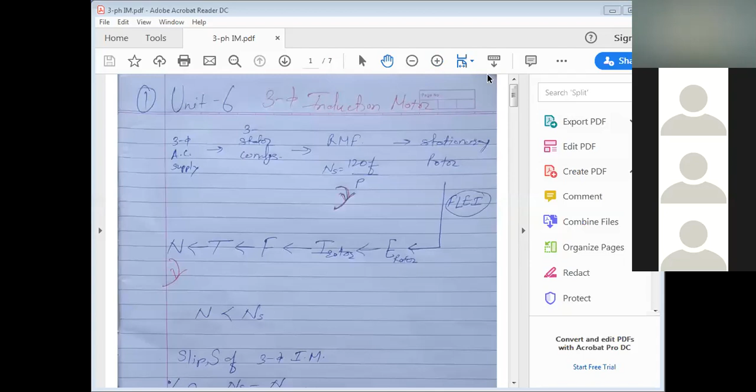Okay, can everyone see the PDF? Yes ma'am. Okay, so in previous lecture we have seen the construction of three-phase induction motor, its working principle, its types, and difference between two types.

In short, I'll revise. On stator, three-phase windings are there. In the terminal box, 6 terminals are there using which you can connect these windings either in star or in delta. Stator core is laminated, made up of silicon steel. Physically poles are not there; you can wind stator windings either for 2, 4, 6, or 8 poles depending on applications.

Next, rotor core is made up of silicon steel. Again it is laminated. There are two different types of rotors: squirrel cage and slip ring.

In slip ring induction motor, 3 windings are there and they are always star connected, wound for same number of poles as on stator. In slip ring, external resistance you can add with the help of slip ring brush arrangement. Why is there a need to add external resistance? Because you can increase starting torque produced by motor, and also variable speed is possible, meaning you can change speed with change in rotor resistance. So that is the facility available in slip ring, that is phase wound three-phase induction motor. External resistance you can change, starting torque you can increase, and speed of motor also you can change.

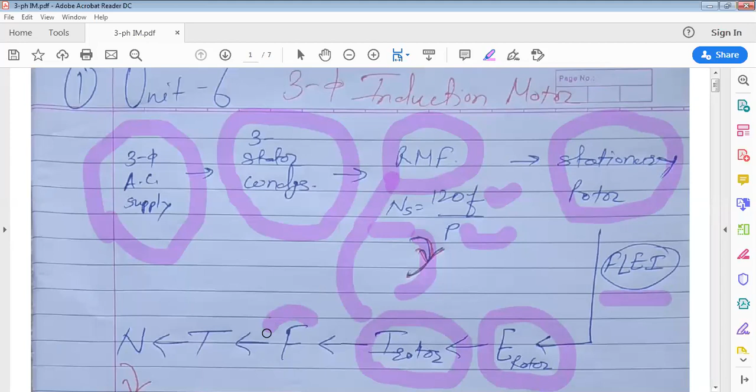Now this rotating magnetic field produced by stator comes in contact with stationary rotor. So as per Faraday's law of electromagnetic induction, EMF gets induced in rotor conductors or windings. The circuit in rotor is closed, so current starts to flow. It's the case like a current carrying conductor placed in a rotating magnetic field, so force acts on each and every conductor, torque is produced, and the windings are so designed that because of the torque acting on each rotor conductor, the rotor rotates in one particular direction.

As per Lenz's law, whatever this speed is, it's because of torque, which is because of force, which is because of rotor current, rotor induced EMF, and this induced EMF is because of the rotating magnetic field. So as per Lenz's law, the direction in which the rotor rotates will oppose the cause producing it, and the cause is the rotating magnetic field rotating in clockwise direction. So rotor will rotate in such a direction that the relative speed difference between rotating magnetic field and rotor speed is less. If both rotate in opposite directions, that relative speed difference will be more. So as per Lenz's law, to reduce the cause producing it, rotor also rotates in the same direction as the rotating magnetic field.

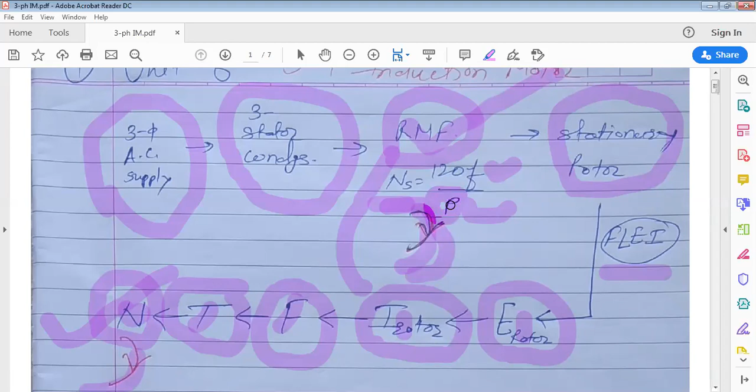So we have seen for frequency 50 hertz, number of poles on stator suppose 4, ns we get 1500 rpm. Now consider rotor is rotating at 1300 rpm. Rotor speed is always less than speed of rotating magnetic field, because of rotor inertia. Suppose rotating magnetic field rotates at 1500 rpm, speed of rotor will be less than that, again because of rotor inertia. So it always rotates at a speed less than the speed of the rotating magnetic field.

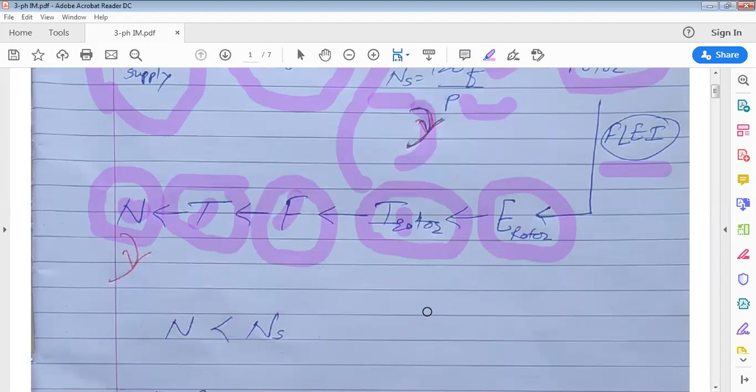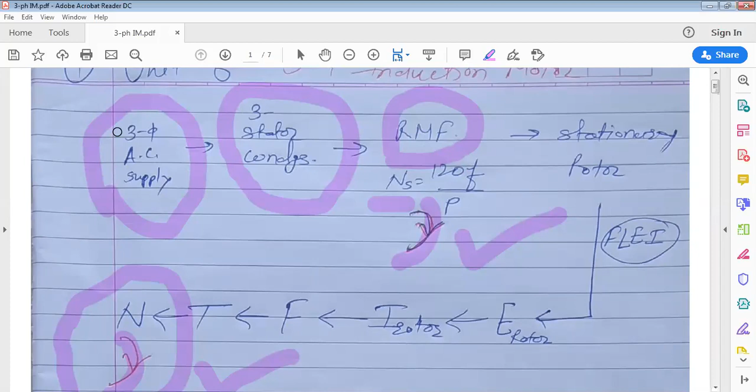So the relative speed difference will be less when both are rotating in the same direction, rotating magnetic field at 1500 rpm and rotor speed at 1300 rpm. Now if you reverse the rotor direction, you have to reverse the rotating magnetic field. How to reverse it we have seen: by swapping any two terminals of the three-phase AC supply to the stator winding, R to R, Y to Y, B to B. Swap any two terminals, then the direction of the rotating magnetic field changes, and so the rotor direction also changes.

Now, ns is the speed of the rotating magnetic field, and capital N is the speed of the rotor. So ns minus n upon ns is called the slip of a three-phase induction motor, denoted by capital S. So S, which is slip, equals ns minus n upon ns.

All of you have to concentrate on this, because numericals will definitely be based on it, MCQ questions, and 4 marks and 6 marks questions too. So slip, denoted by capital S, equals ns minus n upon ns, and percent slip is that multiplied by 100. If you simplify this formula, you get N equals ns into 1 minus s.

Now tell me, the moment you switch on the supply voltage, what is the value of S? What is the condition at t equals to 0? At start, what about the speed of the rotor? The three-phase induction motor works on Faraday's law of electromagnetic induction, mutual induction. Very good. Value of S is 1.

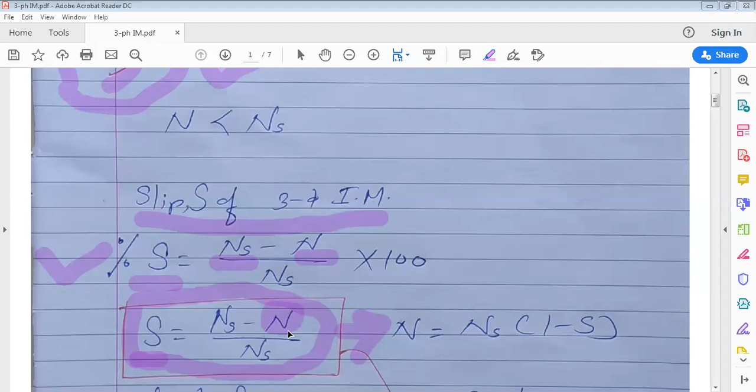The moment you switch on, for a few milliseconds or microseconds, the rotor is not rotating, it is stationary, meaning n is 0. So if n is 0 at start, what is the value of s? It's ns by ns, so it will be 1. Everyone keep this in mind, because in MCQs and sometimes in numericals they ask: at t equals to 0, at start, what is the value of slip? So slip is 1.

Can n be equal to ns? N is speed of rotor, ns is speed of rotating magnetic field produced by stator. So n and ns will never be equal, because of rotor inertia, n is always less than ns. So can slip be 0? When n becomes equal to ns, what will be the value of s? Suppose n and ns are equal, then what is the value of s? Zero, very good. So s can never be equal to 0, because n and ns can never be equal.

So the formula of slip you all got: ns minus n upon ns. Suppose you're asked to calculate the full load slip, then whatever speed is used at that time is the full load speed. So in general, the formula of slip is ns minus n upon ns, and for full load slip, the speed used is the full load speed.

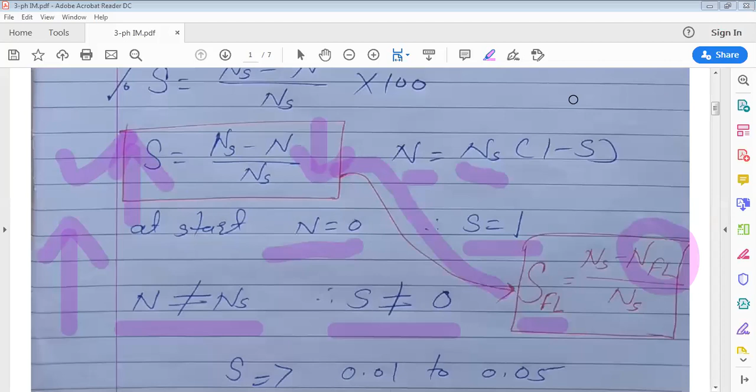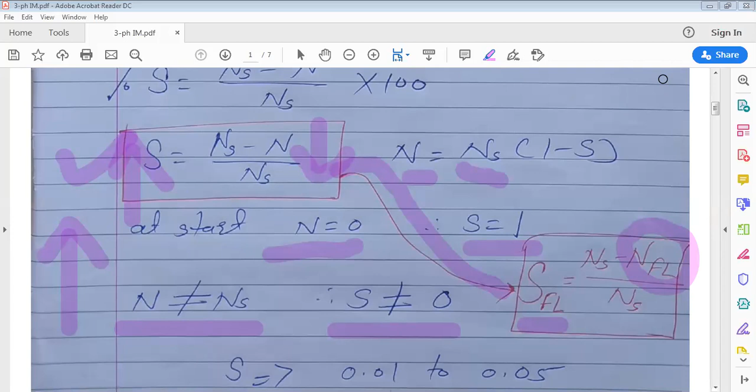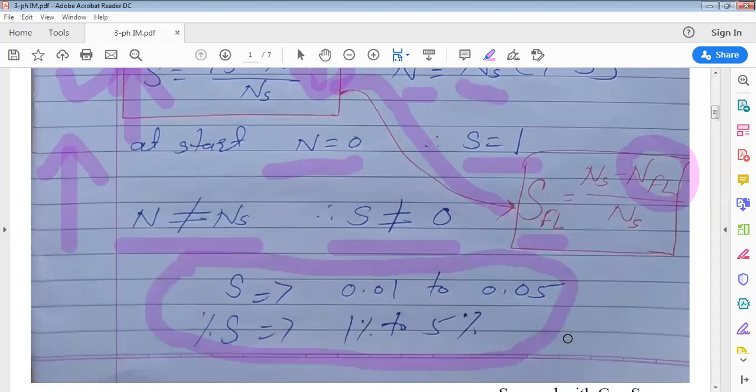What is the maximum value of slip? It is 1, and that occurs only at start, because at start speed is 0. In practical applications, you will find the value of slip only in the range of 1 to 5%, that is 0.01 to 0.05.

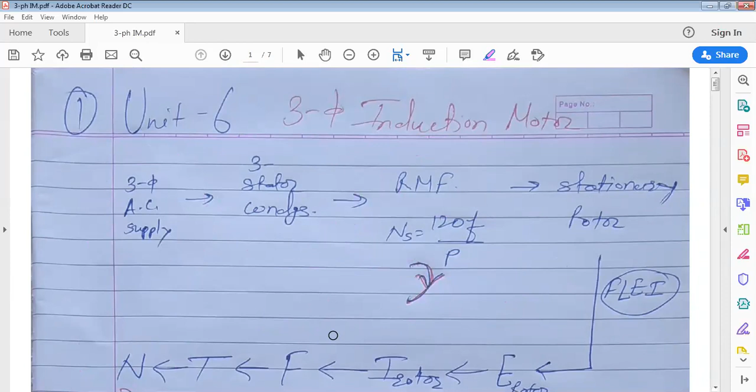Now we have seen the working principle. It works on Faraday's law of electromagnetic induction and mutual induction. So up to the point current is flowing through the rotor, whatever EMF is induced in the rotor is AC, and its frequency is the same as the supply frequency.

But later on, once current starts to flow, the rotor starts to rotate. The moment the rotor starts rotating, this induced EMF's magnitude and frequency both change. So when the rotor is stationary, the induced EMF is called E2. Once the rotor starts to rotate, the induced EMF in the rotor under running condition is called E2R. Suffix 1 is for stator, suffix 2 is for rotor parameters.

So here also E2, and here also E2 — both refer to induced EMF in the rotor. Then what is the difference between E2 and E2R? E2 is the induced EMF in the rotor when it is stationary, and E2R is the induced EMF in the rotor only when it starts to rotate.

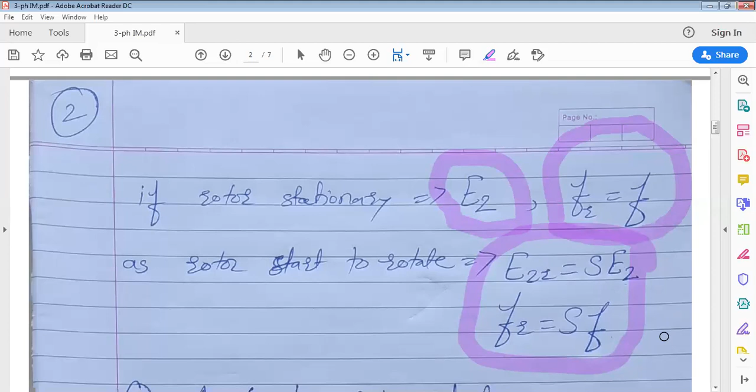The induced EMF, E2R, is AC and its frequency also changes because speed is changing. So FR is equal to S into F. Based on both formulas, you will get numericals. As rotor speed changes, S changes, and that's why induced EMF in the rotor also changes, along with its frequency. So: E2R equals S into E2, and FR equals S into F. At start, for that brief moment, induced EMF is E2 and maximum, with frequency same as supply frequency, 50 hertz. But as the rotor starts to rotate, frequency starts to decrease.

Based on this, numericals will be there. What is the first formula? Ns is equal to 120F by P. Keep all these formulas in mind: Ns is equal to 120F by P, and slip — keep all three formulas in mind.

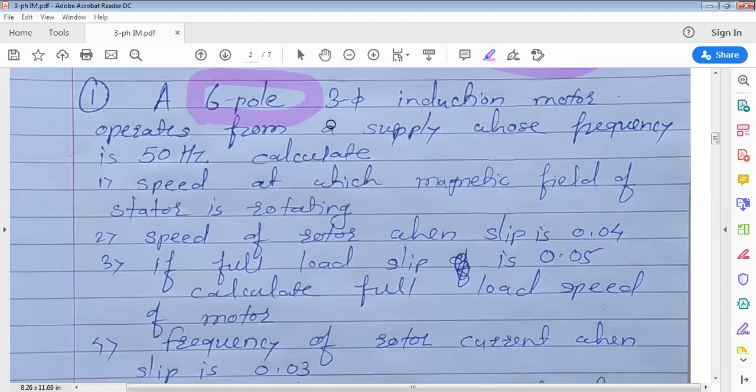6-pole 3-phase induction motor operates from a supply whose frequency is 50 hertz. This means these are the stator specifications: 6 poles are on the stator, it's a 3-phase induction motor, and whatever supply you give, its frequency is 50 hertz. What have you been asked to calculate? The speed at which the magnetic field of the stator is rotating.

Now tell me, the magnetic field of the stator rotates at what speed? Means, what is that speed called? Is it capital N or capital NS? NS, very good. What is the formula? NS is called the synchronous speed.

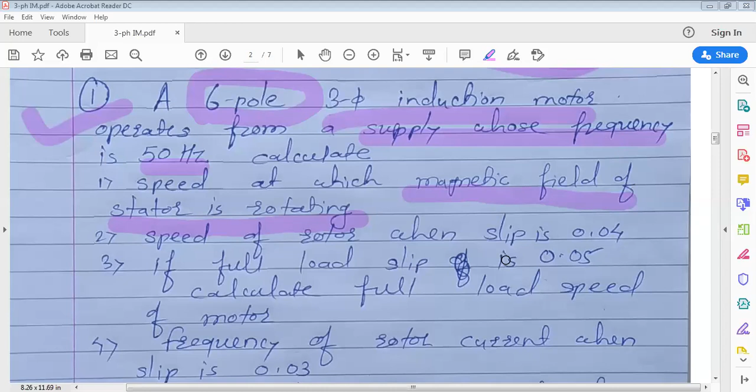120 F by P, all of you know the formula. So you can calculate it. NS equals 120 F by P. Frequency is 50 hertz, number of poles given is 6. So NS is 1000 RPM. Got it?

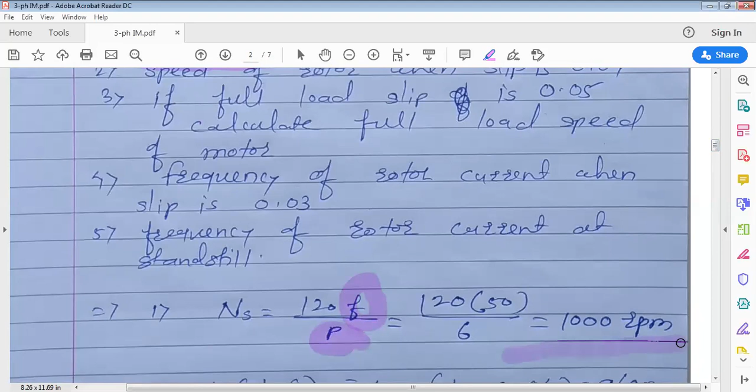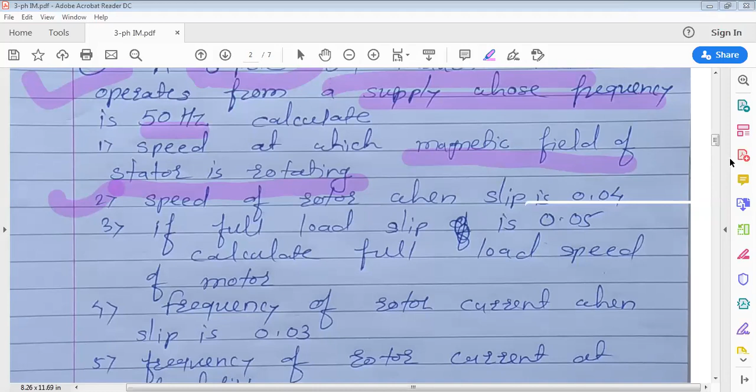Okay, second part: speed of rotor when slip is 0.04. So slip is given and you have to calculate speed of rotor. Which formula can you use? Speed of rotor we denote by capital N, slip by S. Slip is given to you, suppose slip is 0.04. What will be the speed of rotor? The formula we know is S equals NS minus N upon NS.

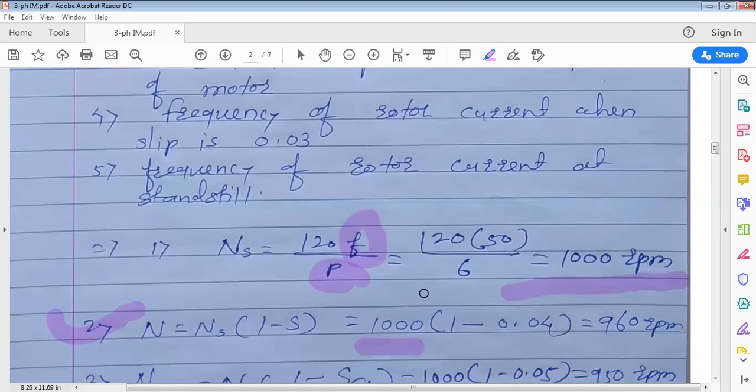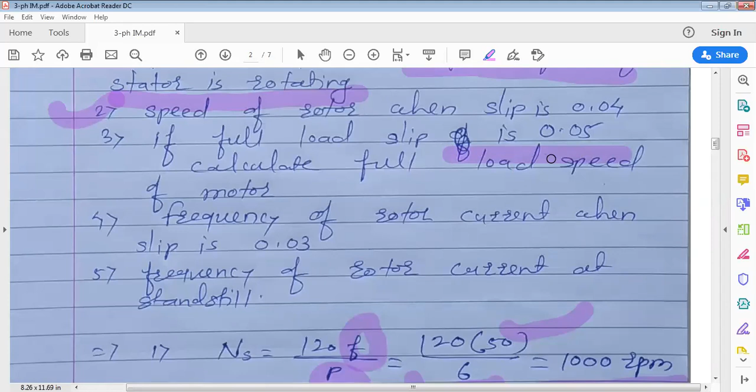If you simplify it, what formula do we get? N equals NS into 1 minus S. NS remains constant because frequency is constant and number of poles are constant. So NS remains constant, and 1 minus S, where S is given to you as 0.04. So put this value, you get 960 RPM. All of you can see N is always less than NS.

Now tell me, does slip remain constant or does it change? Suppose I am changing the load on the induction motor continuously. So tell me, does slip remain constant or does it change? Who can tell? Using the slip formula, all of you know it changes. Very good, because the formula of slip is S equals NS minus N upon NS. As you increase the load, speed decreases, so slip will increase. The reverse will occur when you decrease the load. Clear? What is the conclusion? Slip is not a constant parameter; as load on the motor changes, slip changes.

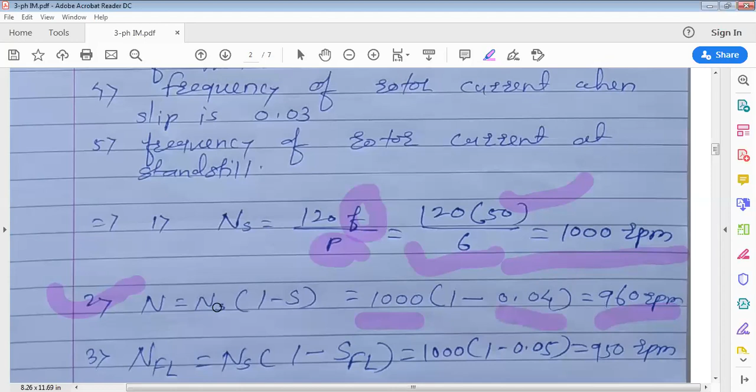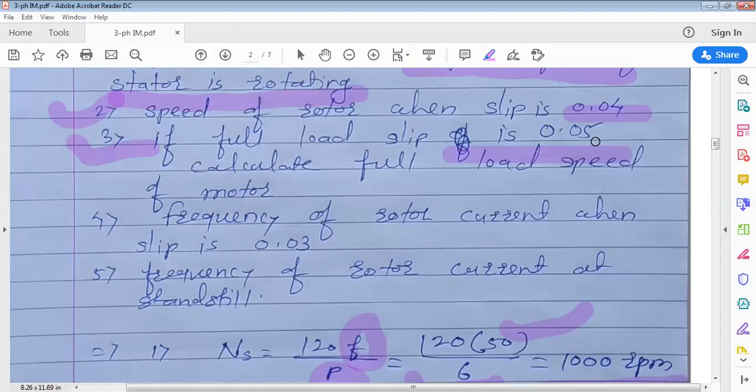So if slip is 0.04, at what speed will the rotor rotate? 960 RPM. Next question: full load slip is given to you. If the full load slip is 0.05, calculate the full load speed of the motor. Use the same formula, only slip is full load and speed is full load. So full load slip is given as 0.05, speed will be least because full load means it is fully loaded, meaning maximum load on it, so speed will be less, right? Because the more the load, the lesser the speed. So you can see at maximum load, slip will be...

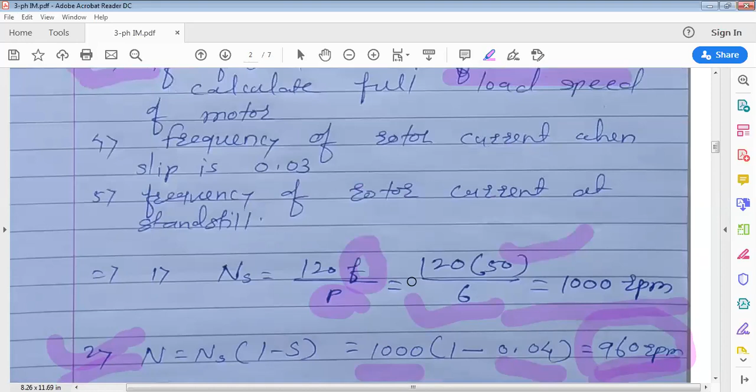Load is maximum, okay, so slip is 0.05, it is given to you. For fully loaded condition, slip is 0.05. So speed is how much? 950 RPM. For maximum load, speed is less. And if you see this formula, if it is fully loaded, what does that mean? Speed is minimum. Right now speed is minimum. If speed is minimum, then slip is maximum.

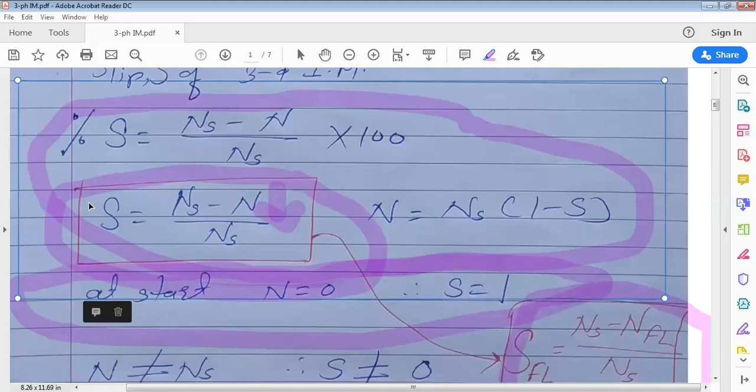Maximum value of slip is there at fully loaded condition. Value of S can never be 0, it is always greater than 0 and less than 1. Value of S will be equal to 1 at start, but it will never be equal to 0.

Maximum is the load on motor, minimum is the speed, so slip is maximum at that point. Maximum value of slip is 1, which is there at the start. At start, speed is 0, so slip is maximum and equals to 1.

If we continuously change the load on motor, what is the other parameter? If load is maximum, then speed is minimum, so whatever slip is there, that also will be maximum. Then the third parameter is full load speed, 950 RPM. Got it?

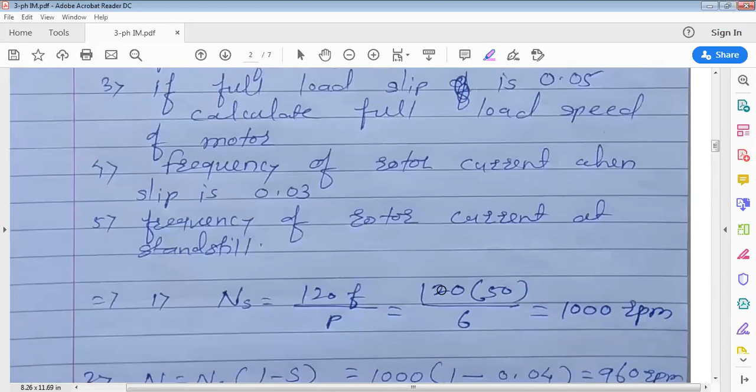Okay, next one we'll see, what is the next parameter? They ask you the fourth one: frequency of rotor current when slip is 0.03. So we have seen the formula, what is it? f2 is equals to S into F.

Whatever the induced EMF in rotor, its formula we know, it is AC, which is equal to S into E2. Whatever the frequency of this induced EMF is, its frequency is S times supply frequency. So S times supply frequency is the frequency of induced EMF of rotor. This formula all of you know.

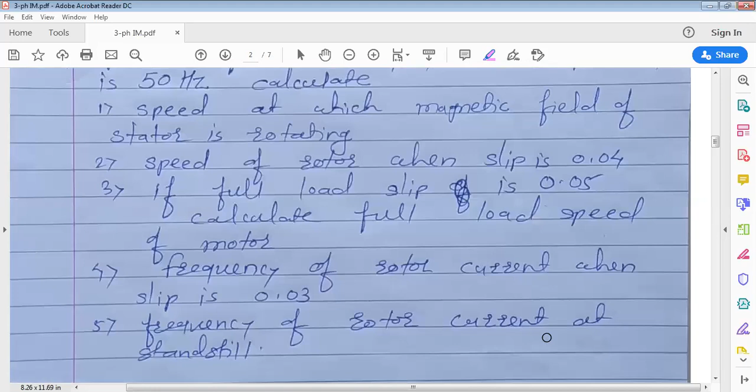So what you have been asked: frequency of rotor current when slip is 0.03. Here slip all of you know, frequency of supply given is 50 hertz. So all of you can see its frequency is less. As load changes, slip changes, frequency of induced EMF changes. So it is very less, all of you can see.

And on frequency, which losses depend? See here, very important parameter, what is the supply frequency? What is its value in India, what is the value of supply frequency?

3 phase, 50 hertz. So on stator side, we are giving 3 phase AC supply. What is the frequency there? 50 hertz. Now that rotating magnetic field comes in contact with rotor. In rotor also EMF is induced, and what is that frequency? S times F, which is very less.

All of you can see, because S is in the range 0.01 to 0.05 in practical applications. So 0.05 times 50 hertz or 0.01 times 50 hertz is very less, all of you can see, it is very less.

So tell me, frequency is different, there is a difference in frequency. For stator side, frequency is very high. Rotor side, frequency is very less. Now you tell me, on frequency which losses depend? We have seen losses and their formula. You tell me which losses depend on frequency.

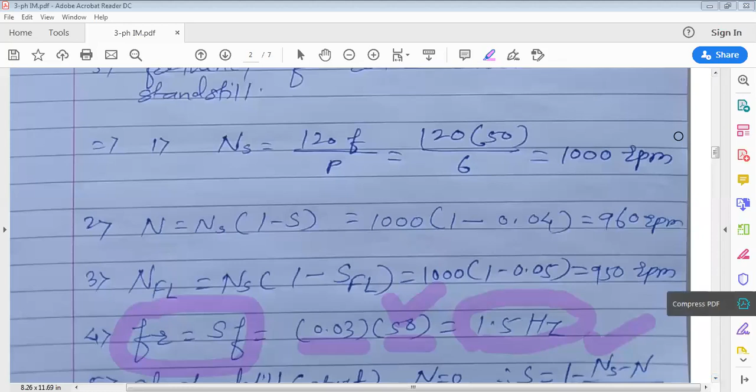Next, frequency of rotor current at standstill. Who can tell? Standstill means what? At start, the moment you switch on supply, that is standstill. Tell me.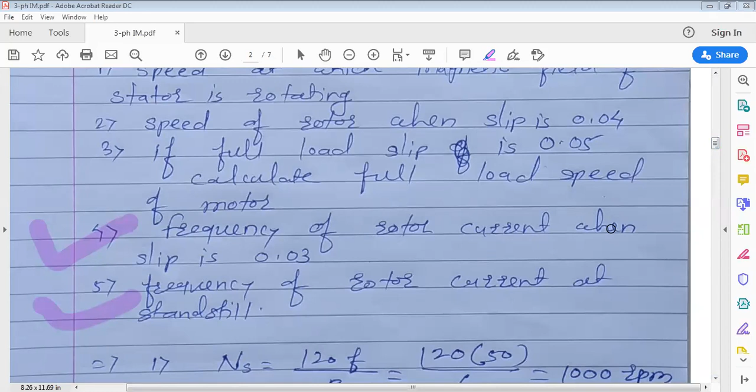No, it's not zero. Frequency of rotor current at standstill is 50 hertz. Very good, because at standstill, the formula is Fr equals S into F.

At start, the moment you switch on, speed is zero. If speed is zero in this formula, what is S? It is equal to 1, which is maximum. If S is 1, and into 50, that is 50 hertz. Clear? So the moment you switch on, for a few milliseconds or microseconds, the rotor doesn't rotate.

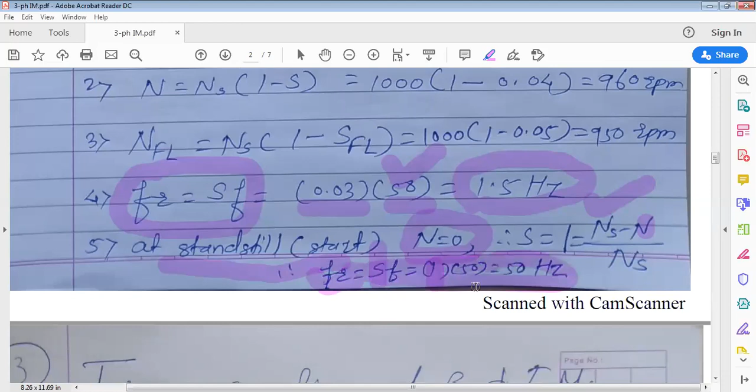So S is 1, so for that few milliseconds or microseconds, whatever the induced EMF in rotor, its frequency is 50 hertz. It is only for a few microseconds, or maybe even less time than that. Clear, this sum? Everyone prepare this sum.

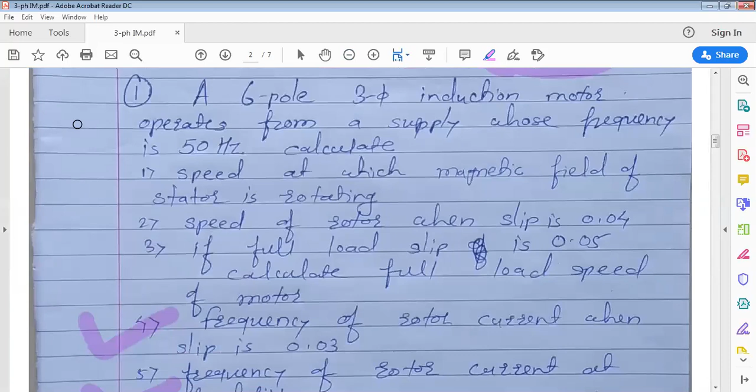MCQ questions are based on this, then 4 marks, 6 marks questions. Sub part of it for 1 mark, complete sum for 4 or 6 marks. Got the sum? Can we go for the next topic?

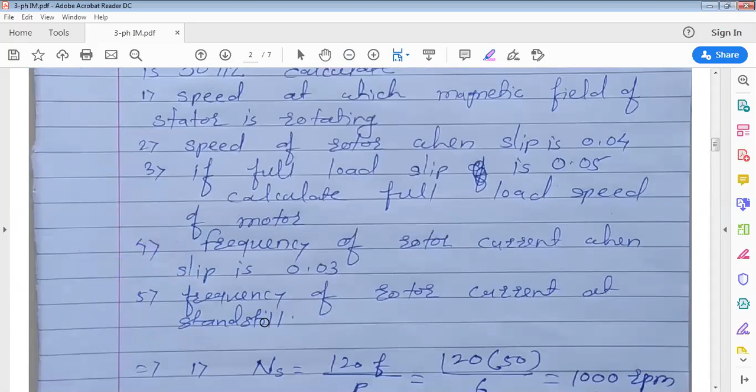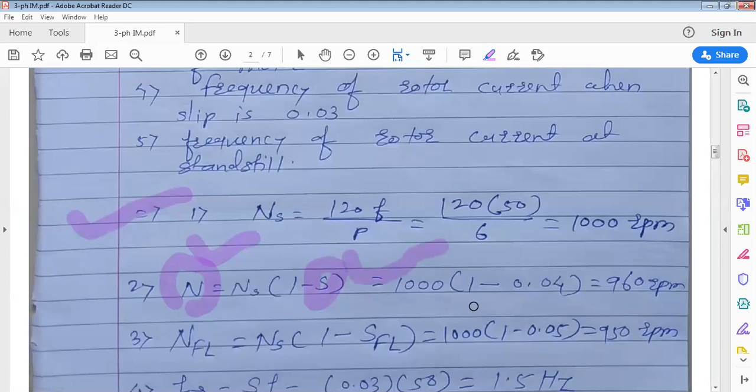Clear sum? Easy hai? Synchronous speed of rotating magnetic field, 120F by P, slip is given to you. You can calculate speed or reverse. Sometimes speed is mentioned and you're asked to calculate the slip. Same formula you can use for full load also.

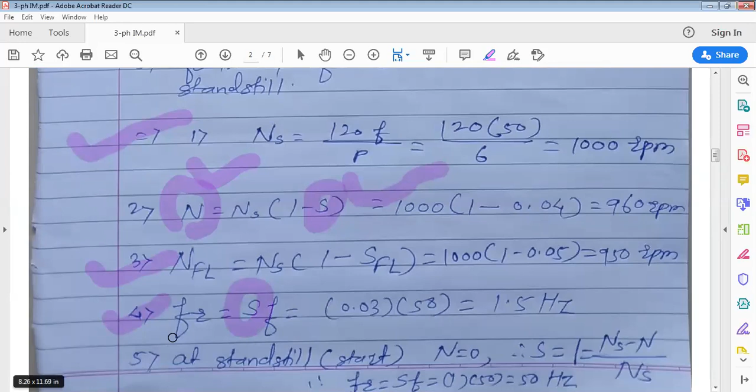This formula you know, Fr equals S into F. So for some particular slip, the value of frequency of induced EMF in rotor you can calculate, and at standstill, at start, keep this formula in mind: S is always 1 and Fr is always 50, same as the supply frequency. Can we go for next part?

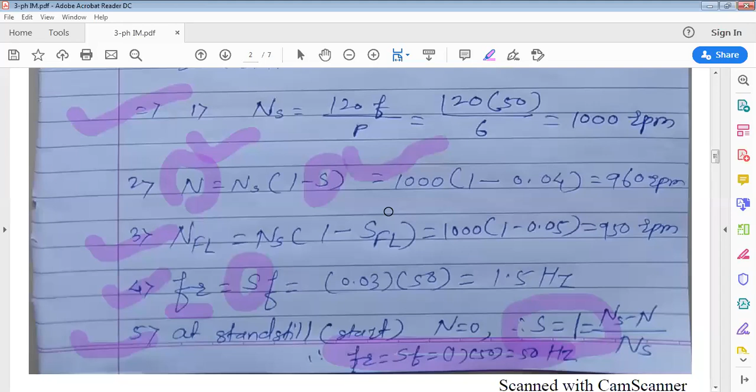Next part is the torque equation of three-phase induction motor. Can we start with the next part? Yes, is everyone clear up to this?

Reply in the chat box, can we go for the next topic? Got the sum? Clear up to this? Okay, we'll start with the next topic, the torque equation of three-phase induction motor.

Once we derive the torque equation on this, derive the expression for torque of induction motor, and once we derive the torque equation, we can go for the torque-slip characteristics of three-phase induction motor.

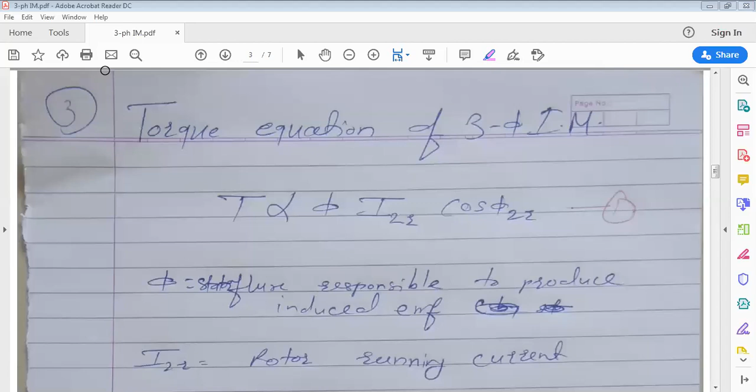So who can tell me, torque motor produces? We have seen this one. Tell me about the torque produced, we are going to derive the expression for this torque, which acts on rotor and due to which rotor starts to rotate.

Now tell me, this torque which acts on each and every rotor conductor, what do you think it depends on? Which parameters? Yes tell me, what do you think? Many parameters are there, any one or two can you tell?

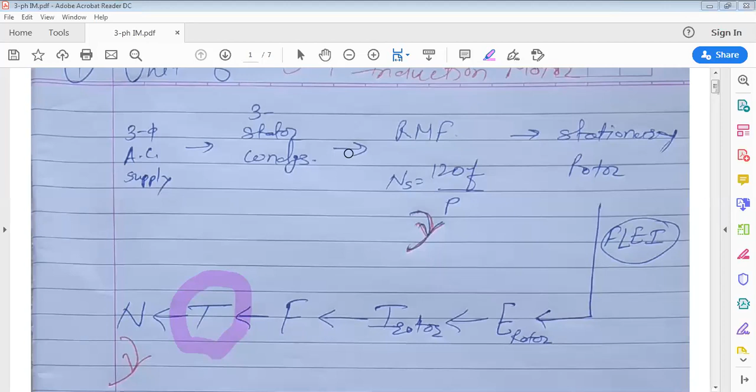Yes, this torque produced, it depends on which parameter? Current, very good, which current? Rotor current. Again which parameter? Does this depend on magnetic field? Rotating magnetic field also it depends on. This one, again cos phi.

Okay, so these are the parameters used in derivation. So whatever torque acts on the rotor conductor, it depends on stator flux, because this is the flux produced by stator, and because of this flux only, EMF is induced in rotor, right?

It depends on current flowing through rotor also, and cos phi means power factor. Power factor of what? Obviously torque acts on rotor, so obviously rotor power factor, but under running condition. So these are the three parameters considered here: rotating magnetic field, rotor current, and rotor power factor under running condition.

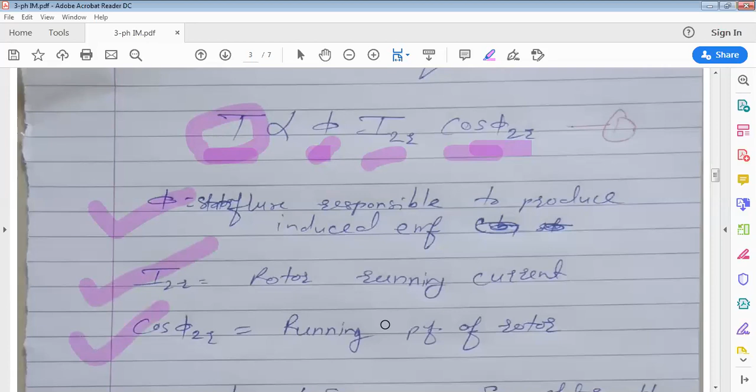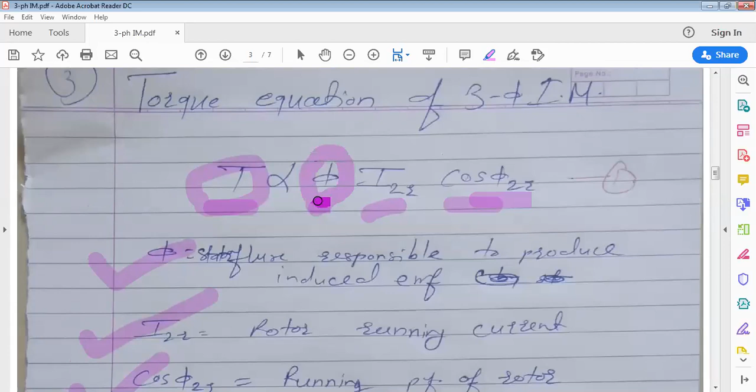2 means what? Stationary. And 2R means what? Running condition. Okay, now whatever this rotating magnetic field which is produced by stator, it depends on supply voltage, that is the stator voltage. We have seen the working principle of three-phase induction motor is same as that of transformer.

It works on Faraday's law of electromagnetic induction, mutual induction. Stator winding we can consider as primary, and rotor winding we can consider as secondary of transformer. So whatever is the transformation ratio formula for transformer, same you can use for three-phase induction motor.

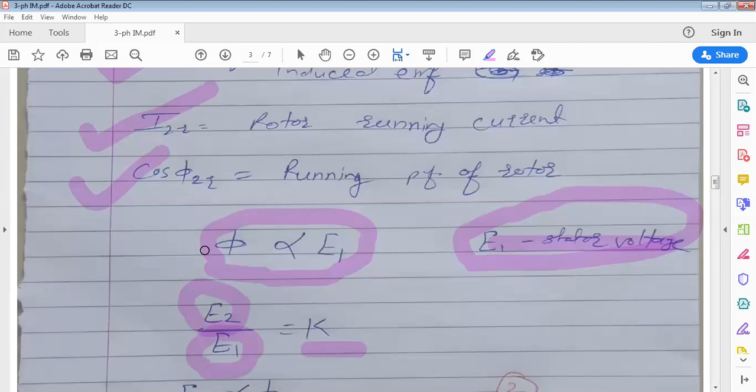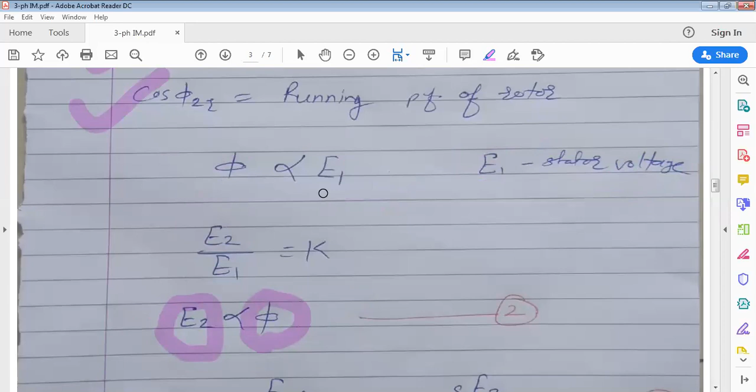That's why I can write E2 by E1 equals K. Flux produced depends on E1, so E2 depends on flux. Whatever voltage you apply to the induction motor, in proportion it produces a rotating magnetic field. This flux, its magnitude and speed, determines the rotor induced EMF. Whatever EMF gets induced in the rotor depends on the rotating magnetic field produced by the stator, and that rotating magnetic field produced by stator depends on supply voltage. That's why we can write E2 is directly proportional to phi.

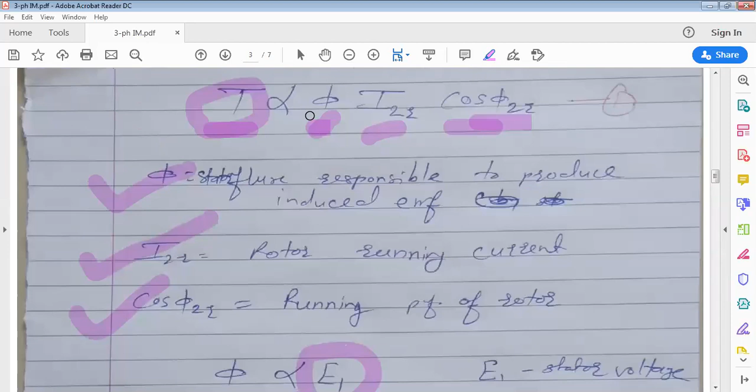So here we can replace phi by E2 - that's what it means, they have replaced phi by E2. The next parameter is I2R, the current under running condition, which equals E by Z, as all of you know.

So I2R equals E2R by Z2R. E2R is S into E2. The formula for impedance, as you know, is square root of R square plus X square. So here R2 square, whatever formula we use for E2R is S into E2, and the same applies for impedance. X2R is S into X2.

For frequency also we have seen F2R equals S into F, same in the same terms. This derivation is not directly in your syllabus, this formula, but its derivation is there in BL Theraja. E2R equals S into E2, X2R equals S into X2. So we got the formula for I2R also.

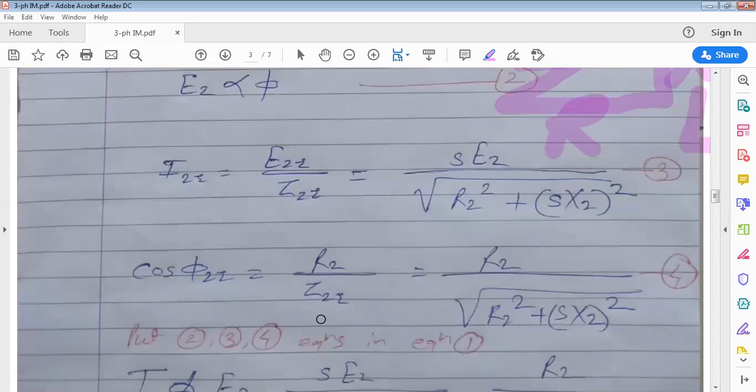What is cos of phi? From the impedance triangle, which all of you know, along this side is R, this is Z, R equals Z cos phi. We've seen this number of times. This three-phase induction motor is considered an inductive type of load, so XL is there. So cos phi is R by Z, or R equals Z cos phi. So R is R2 and Z2R, the same formula we used here for Z2R.

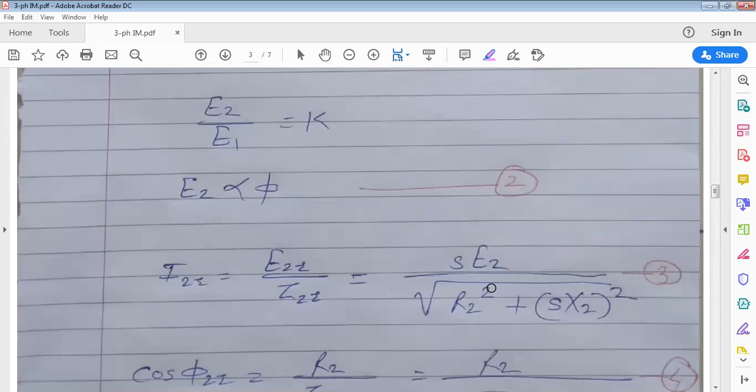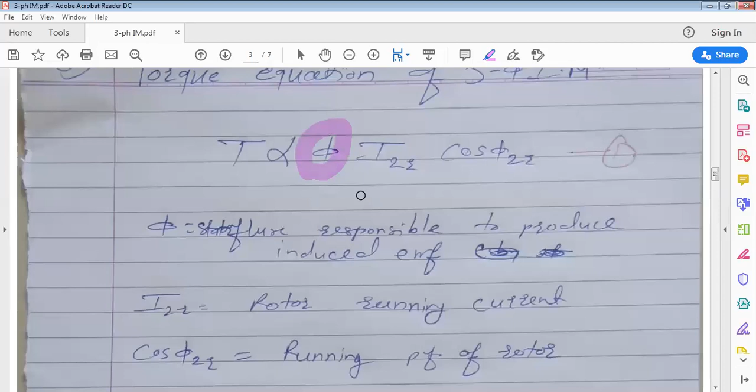Put this equation together with whatever we've seen up till now - E2 in this formula we've seen, torque depends on flux, I2R, and cos phi 2R. So flux will be replaced by E2, we are going to replace it by E2 I2R. What is the formula for it? E by Z, and for this, R by Z.

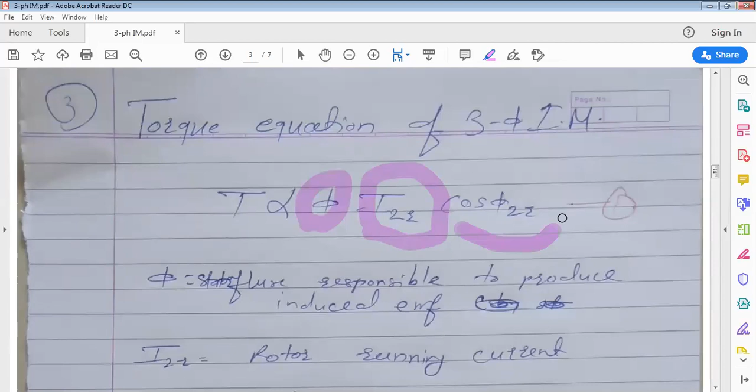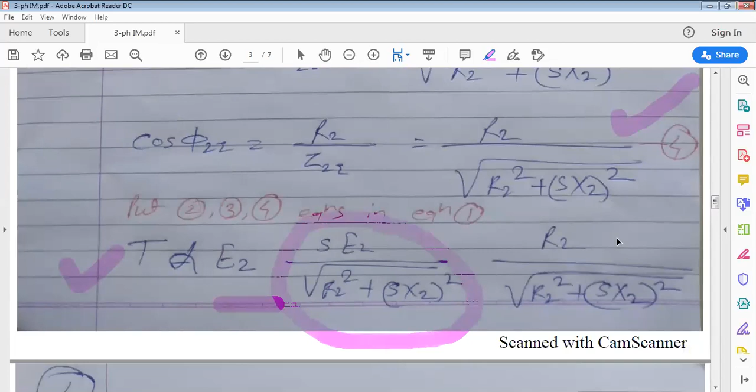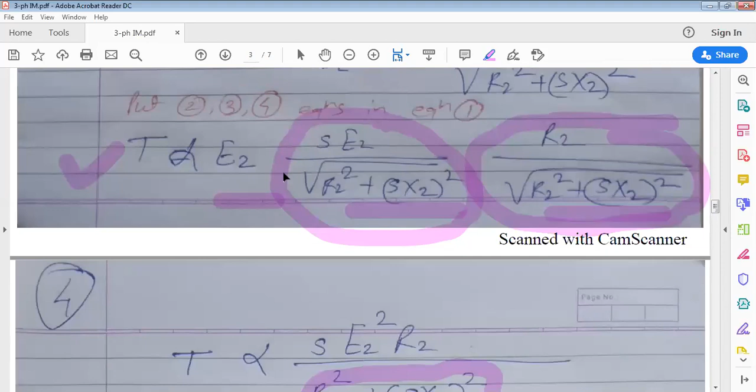So in this one equation we will put equations 2, 3 and 4. Put it in and simplify, and you will get it like this: flux equals E2, this is the formula for I2R, and this is the formula for cos phi 2R. Simplify this, it's a similar parameter. So in the denominator it will be like this, and in the numerator, E2 square S into R2.

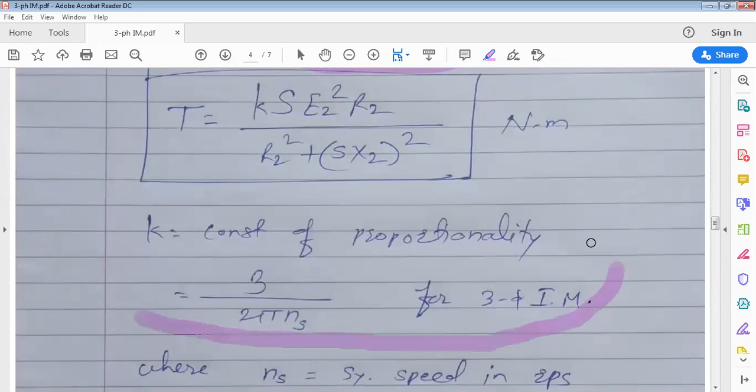Got it? This proportionality constant for a three-phase induction motor is 3 divided by 2 pi ns. Capital Ns is the synchronous speed of the rotating magnetic field in revolutions per minute, and small ns is the synchronous speed of the rotating magnetic field but in RPS - that is the only difference. Capital Ns in RPM, small ns in RPS. So this proportionality constant k equals 3 divided by 2 pi ns, clear for three phase induction motor.

So put here the value of k in this formula. So this is the torque expression: T equals 3 divided by 2 pi ns, s into E2 square R2, divided by R2 square plus S into X2 square.

So if you observe it, does torque depend on slip? As load changes, what happens to slip - does it change or remain constant? Yes. As load on the motor changes, does the speed of rotor change? Consider it's a three-phase induction motor, and you are changing the load on it. So speed changes, this capital N changes. So slip will change. Yes, it changes, so torque also produced by the motor changes because torque depends on slip.

Again, it depends on the induced EMF in the rotor at standstill condition, not under rotating condition. What is E2? It means the induced EMF in the rotor at standstill condition.

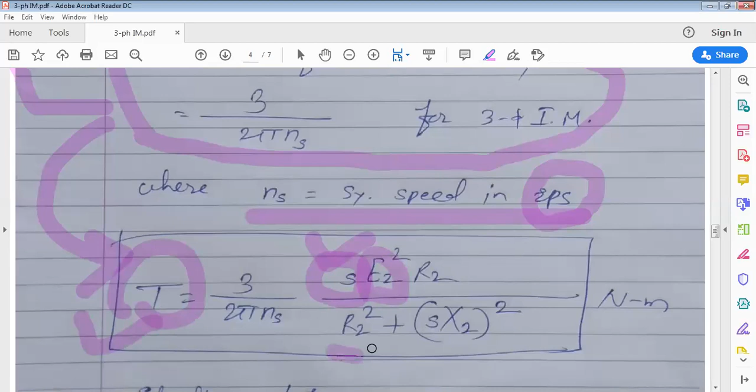It depends on R2 and X2, which are the rotor resistance and rotor reactance. But at what condition? At standstill. So these are all standstill parameters: E2, R2 and X2. And it depends on slip also. It depends on ns also, but ns is constant because frequency is constant and number of poles on stator are constant. So this parameter is constant.

So what we can say is, torque produced by the motor depends on slip. Nothing but it depends on speed of motor, nothing but it depends on load. As you go on changing load, speed changes, slip changes. It depends on E2, it depends on R2 and X2.

R2 and X2 are considered constant. Once the rotor gets designed, R2 and X2 remain constant unless, if it is a slip ring induction motor, you add external resistance in it. If rotor resistance is kept constant, then R2 and X2 are constant.

Now, starting torque. At start, what is the value of S? At start, meaning the moment you switch on, what is the value of S? It is 1. At start, speed is 0, so S is 1. So if you put S equals to 1 in this formula, you will get the formula for starting torque. So this is the formula for starting torque, and this is the expression for torque.

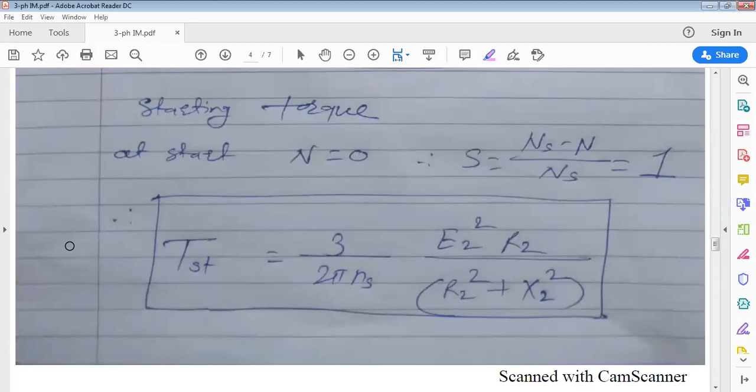So this is about the derivation of torque. What we have seen up till now is we have derived the formula for torque produced by a three-phase induction motor, and on which parameters it depends. For starting torque, we put S equals to 1 in the above formula to get the expression for starting torque. Now we'll derive the torque slip characteristics of three-phase induction motor.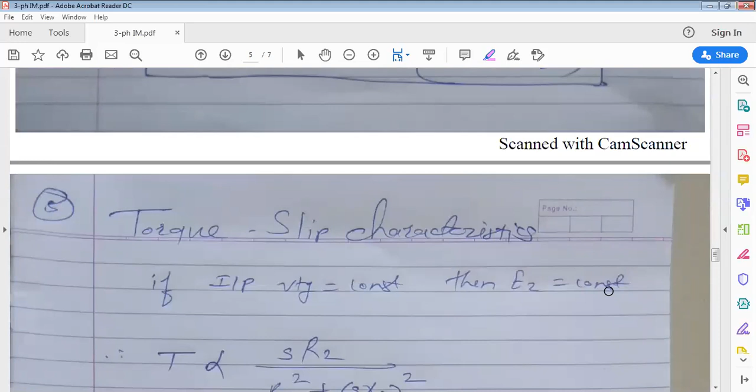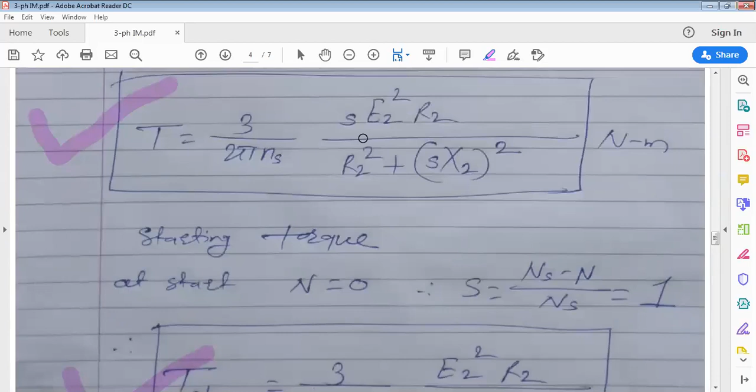All of you know that is the input voltage. Consider the input voltage to the three-phase induction motor is constant, that is 415 volts. So E2 also is constant. E2 means the induced EMF in the rotor at standstill condition. So if E1, the primary side voltage, is constant, E2 also will be constant. In this formula, E2 is constant because it is the induced EMF at standstill. Input voltage to the three-phase induction motor is constant, so E2 also is constant, and this one also constant.

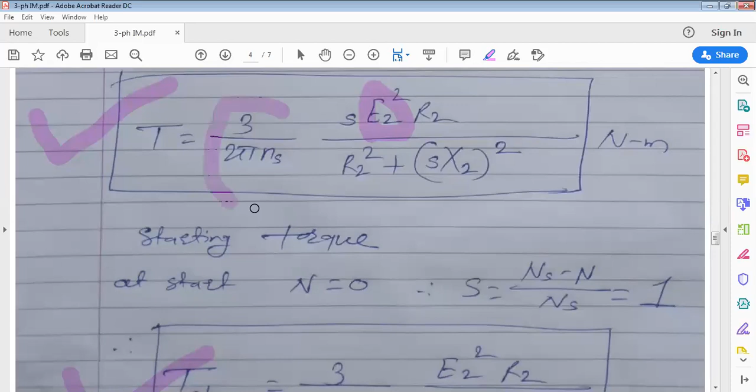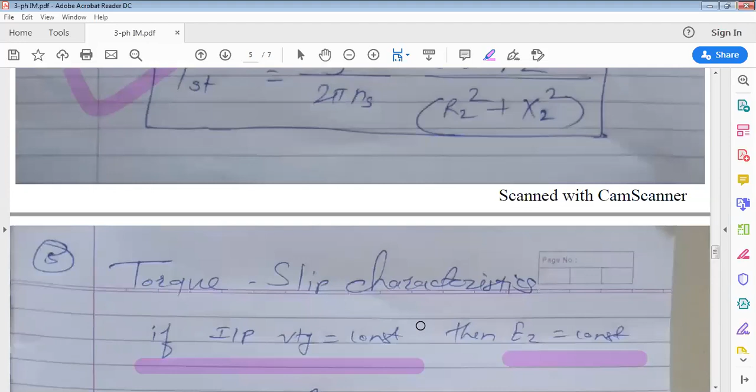So we can say torque is directly proportional to S into R2 divided by R2 square plus S square X2 square. We are going to see the torque slip characteristics of three-phase induction motor. If you observe, we have derived the formula for torque, and this one parameter is constant. If input voltage is constant, E2 also will be constant because E2 by E1 is K. So E2 also is constant, so torque is directly proportional to S into R2 divided by this complete parameter. This is the formula we'll use to explain the torque slip characteristics. Here R2 is rotor resistance and X2 is rotor reactance.

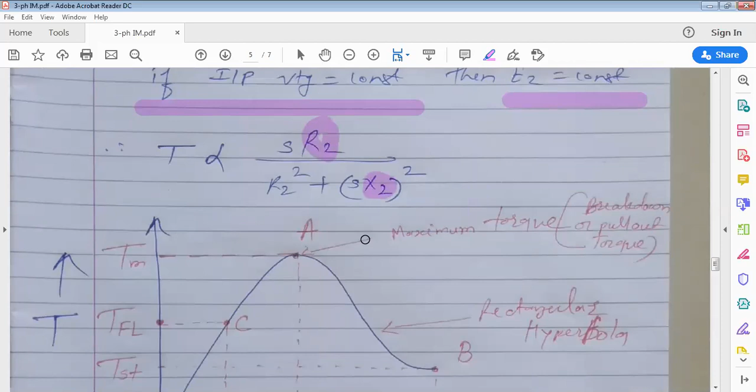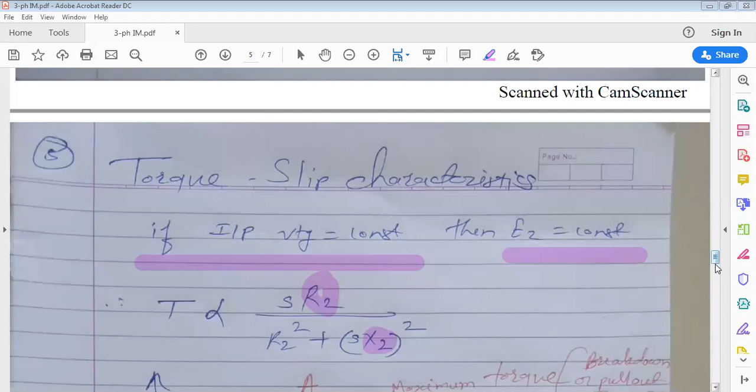Now, in this torque slip characteristics, tell me, does torque depend on slip or does slip depend on torque? As you change load on the motor, speed changes, then slip also changes, and then torque will change. So does slip depend on torque, or torque depend on slip? Torque depends on slip. That's why torque you will take along the y-axis. Because the dependent parameter we always take along the y-axis. So torque is along the y-axis.

Okay, so torque slip characteristics, torque along the y-axis and slip along the x-axis. Now see here the torque slip characteristics. So in this torque slip characteristics...